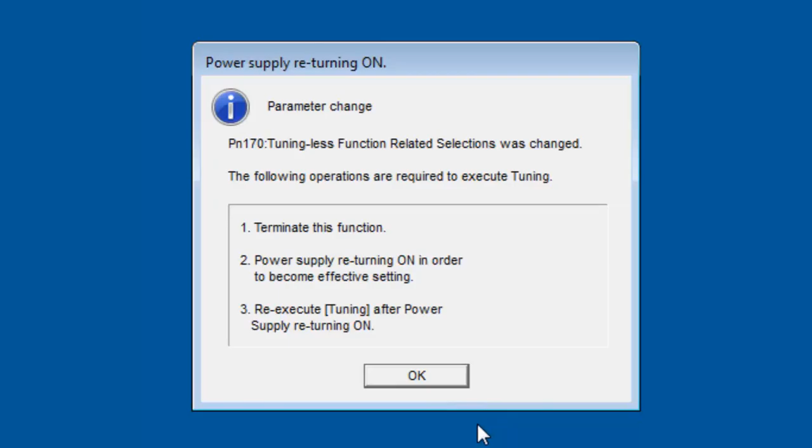Here's a quick preview. We'll disable tuningless on the x-axis, then measure the moment of inertia ratio for the connected load. We'll use the program jog move profile as the position reference, set the mode and mechanism, and execute the auto-tuning sequence, measuring the final response. I'll give you a few troubleshooting tips and then let you try it out on your own with the y-axis. So please follow along and let's run through auto-tuning.

To improve the response beyond the capability of tuningless, the next stop is auto-tuning, as long as the load inertia does not change. Autotuning is an algorithm that measures the servo response and iteratively makes tuning parameter adjustments while the machine runs a test move over a number of cycles. It can apply advanced tuning features such as model following control, vibration suppression, and anti-resonance.

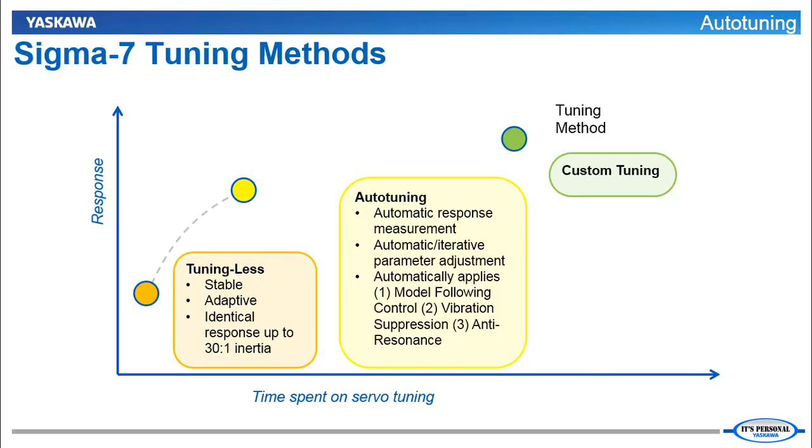As usual, I have connection here to the demo, and we'll go to SigmaWin Plus version 7, and let's start with a clean screen here. Close any other windows you may have open in SigmaWin Plus. And you see here we are connected on axis A, that's the x-axis. The first step to get down to the auto-tuning is to go down here to tuning. And the summary of these warnings is simply that the motor will move and won't return to the place it is now. Let's click execute. And by clicking OK, we disable the tuningless function.

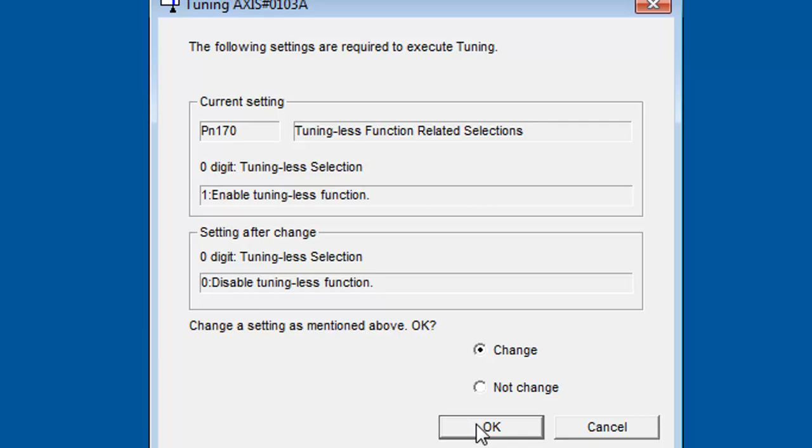OK. We need to reboot, cycle power, software reset. So OK. Into the menu, software reset. Execute that, and click execute. Okay, it says we should reconnect. So we come up here to menu, disconnect, and connect again.

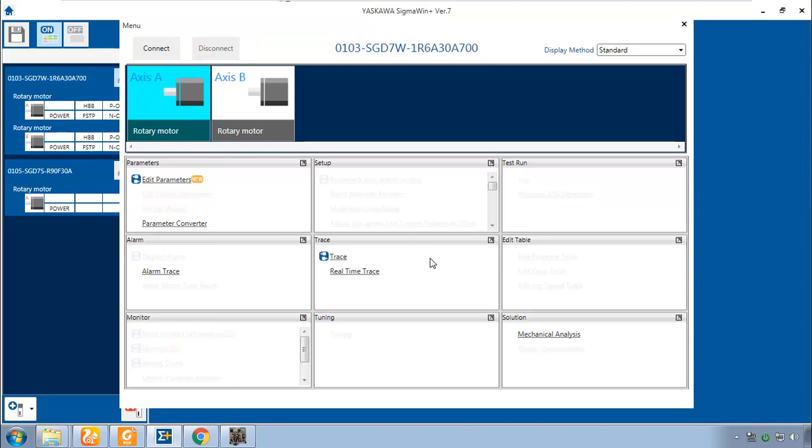Now that tuningless is off, we go into tuning again with the same message. And the basic auto-tuning process is outlined right here. We'll start at the top and work our way down toward the bottom. It's very important to know the load-to-motor moment of inertia ratio when tuningless is off and have that set in parameter PN103 because the position loop and speed loop gains are scaled by this parameter. So if you don't set it accurately, you're not going to get a very good tuning result.

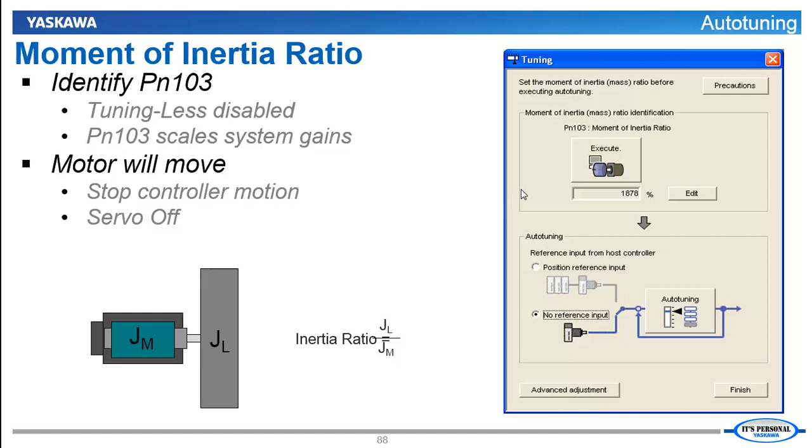For this reason, the software provides this feature to measure the moment of inertia ratio, often referred to as JL divided by JM, inertia ratio. But in order to execute that, the motor is going to have to do a little test move. Click execute, and that opens up this condition setting window for the moment of inertia measurement. You don't usually need to change the values on the left, but you do need to pay attention to the reference selection and the speed setting here on the right.

Choose a motor RPM that is appropriate for the mechanism. Generally speaking, the higher speed and higher acceleration values will result in a more accurate moment of inertia ratio measurement. Our worst case test move was 3000 RPM, and so this one here at 1000 RPM is definitely within range. You can always confirm with this button, and this gives you the speed and accel/decel time. This is the move that's going to happen over a distance of 2.5 rotations.

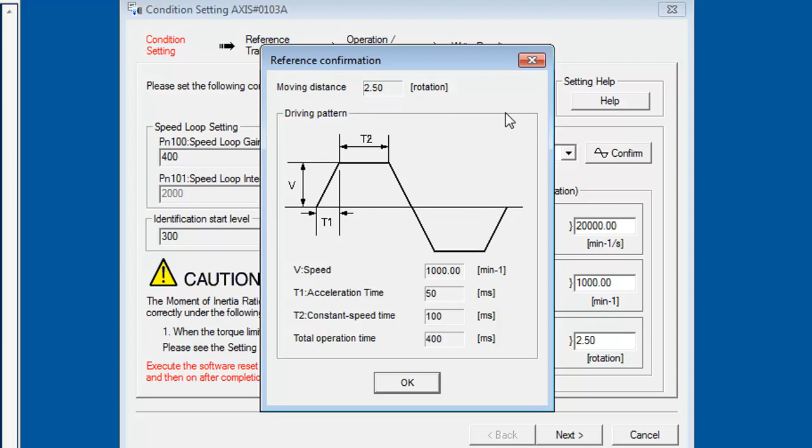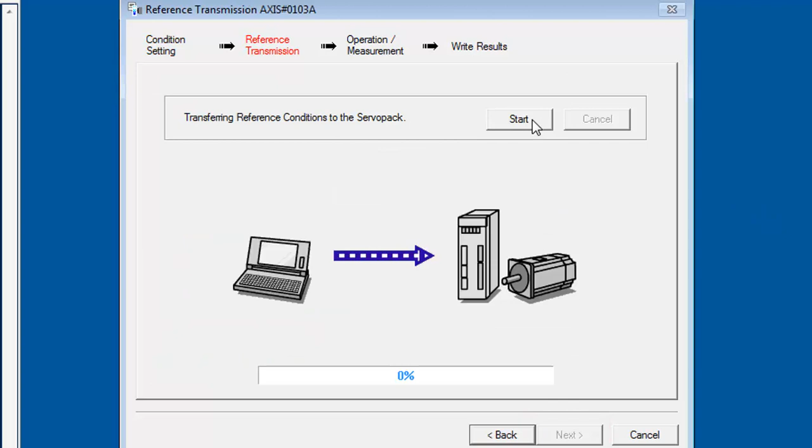So of course, check that you have appropriate travel distance, and if necessary, you can use these sliders to make any adjustments so that you don't exceed the machine's range of motion. For this demo, we can leave everything at default and click next. This is a function built into the servo, so we click start to transfer those conditions we just set to the servo. Click next again. Now let me adjust the window, and you might want to turn on the speaker so you can hear what's going on.

And now we will servo on, execute the move forward, and again reverse. You see what it did here, it iterated starting with an arbitrary value of 3 to 1, 300% load to motor inertia ratio. It did this test move and it comes up with now a closer value of 10 or 11 to 1.

We'll do it again, forward. And reverse. And again, forward. It's doing a little test move, and it's running the equations of motor sizing backwards. Torque equals inertia times acceleration. Well, it's measuring the torque, it's measuring the acceleration, and trying to figure out the inertia. Hit reverse. Now we've got about 15, 16 to 1. Again, forward.

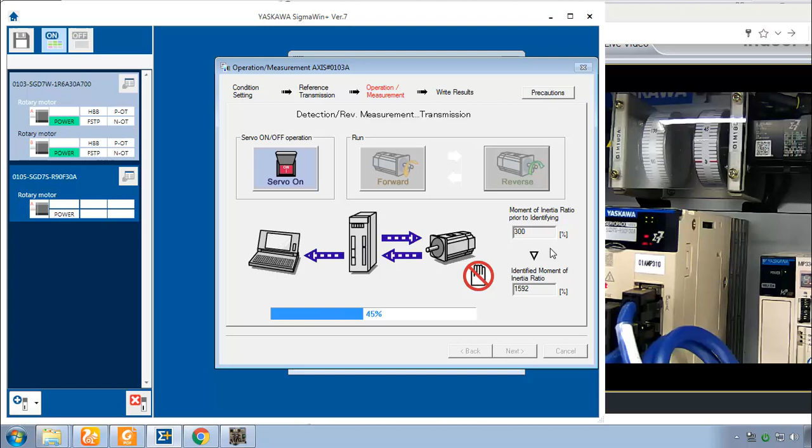And it looks like it's settled in on 15.93 to 1, or 1,593%. So follow this here through to the end with next. Turn the servo off. And now we can write this result into the parameter, PN103.

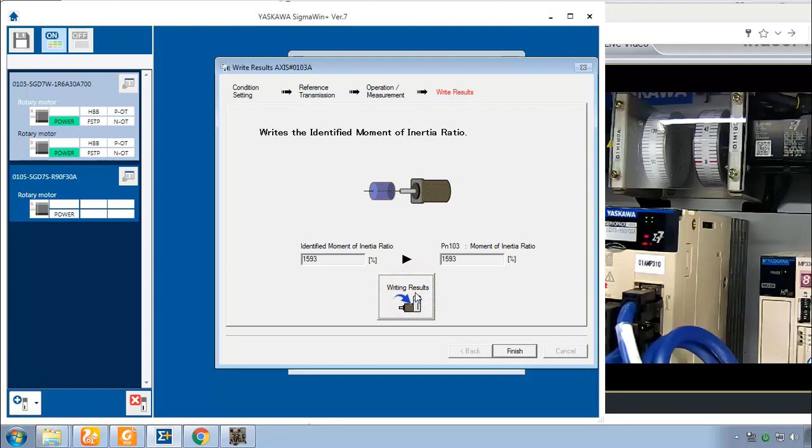Finish this up. We're prompted for software reset, okay. And here they even pop that up for us, software reset. Drive turned back on, software reset's complete, and we're back to the tuning screen with the inertia ratio measured and set.

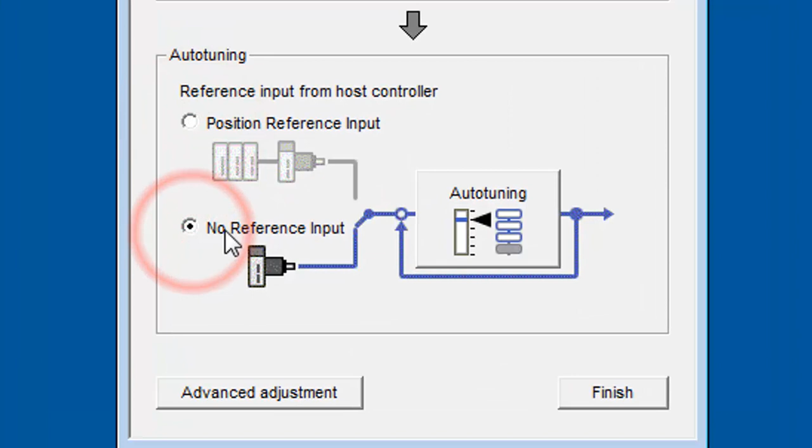Okay, now we're ready for the next step, which is auto-tuning. You've got two choices here, position reference input and no reference input. Which one do we choose? We'll choose position reference input. The difference is shown in the little picture here, the controller sending a command to the servo or no reference input, which would mean that this function itself can set up its own little test move, similar to what we had here in the moment of inertia ratio measurement.

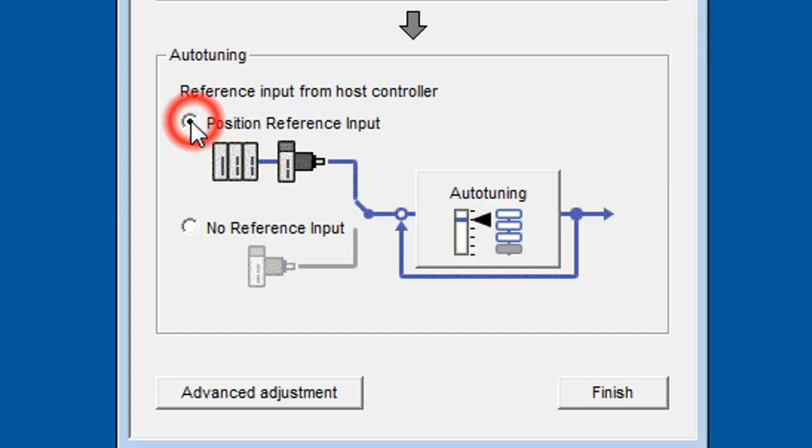So while program jog is internal to the servo, it's still seen as a position reference input to the control system. So we'll use position reference input to tune to the worst case move that we have set up in program jog. And click auto tuning. This is our final setup screen for auto tuning. We have mode selection and mechanism selection and tuning parameters.

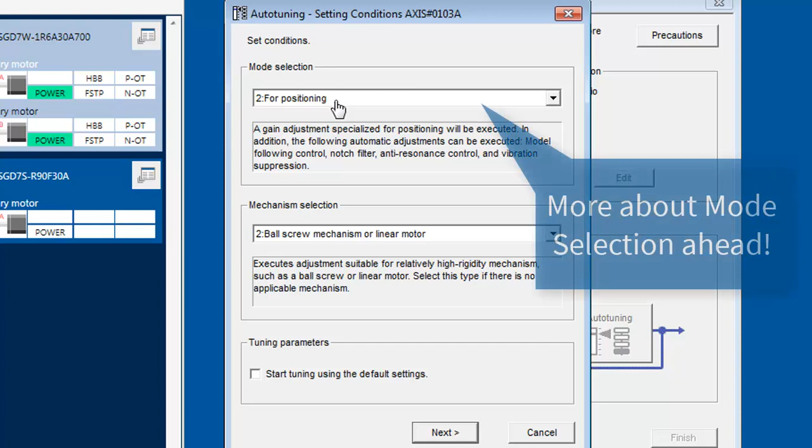The default is mode number 2 for positioning. We'll leave it at that. The mechanism we will change to rigid model, and we will check the box start tuning using the default settings. So why choose mode number 2? Well, there's 3 modes here. Mode number 1, standard, will allow you to have the lowest position error, but not the lowest settling time. If you want the lowest settling time, then you choose mode 2 or mode 3.

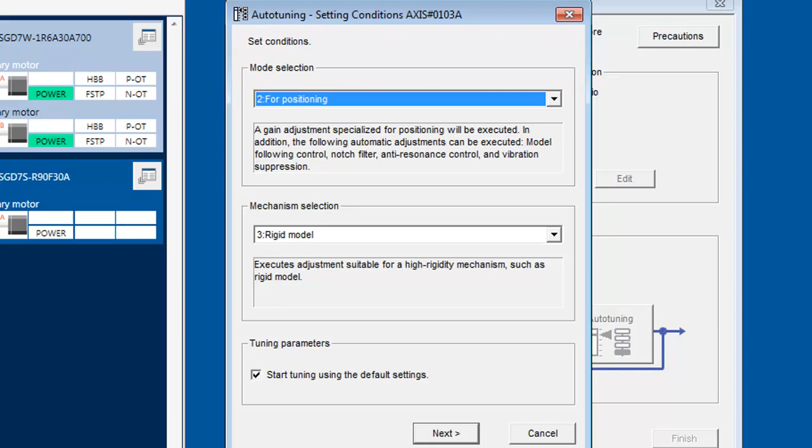See, mode number 1 allows you to use notch filter and anti-resonance, but mode number 2 allows you to use model following control and vibration suppression in addition to those two. And mode number 3 is basically the same, but may result in slightly longer position settling time in order to prevent overshooting, meaning that as the motor stops, it won't overshoot the final target position. With mode number 2, the motor may overshoot slightly, but the total position settling time will be the shortest.

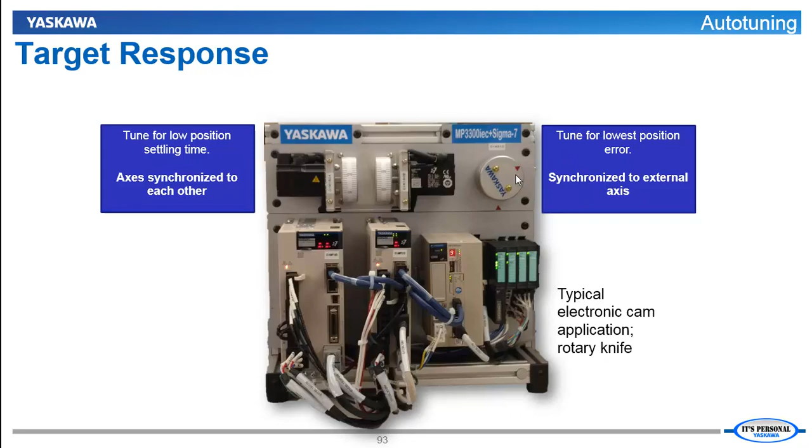Now, what about mechanism? We chose rigid model. Why don't we choose belt or ball screw? The simple answer is just choose the model that most closely represents what you have. But what these 3 mechanism selections are about is setting the level of mechanical compliance in your system. Systems with more mechanical compliance, like a belt mechanism, tend to be less stable, whereas this rigid model is very stable and will be capable of a very high frequency response.

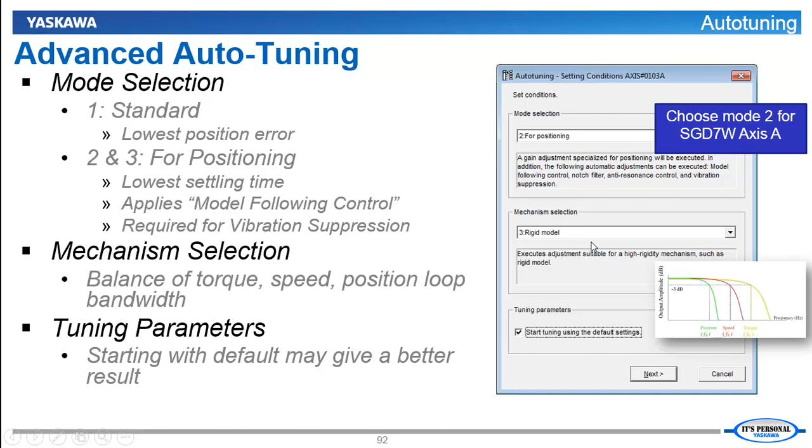The setting you choose here balances the bandwidth of the torque, speed, and position loops and helps keep the system stable based on the level of rigidity or mechanical compliance in the system. So that's why we chose rigid model. Finally, you should check the box for start tuning with default settings. The auto-tuning algorithm is optimized for starting with default and finishing fully tuned. Running auto-tuning a second time does not improve the result.

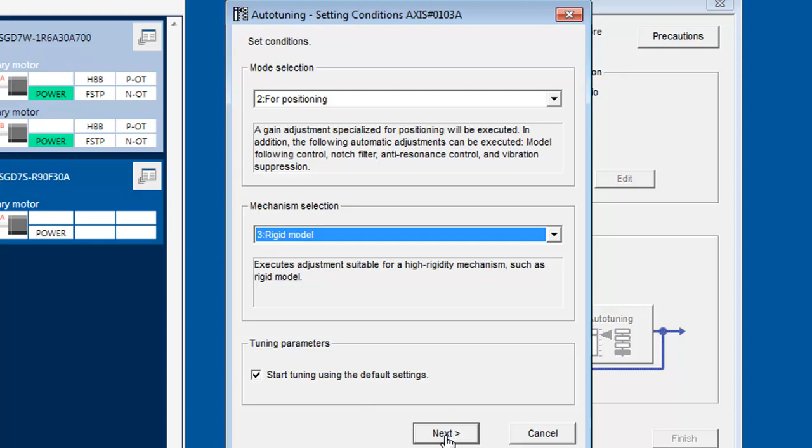However, if you've set some parameters, for example, to eliminate the noise, you may have reduced PN100, you might leave this box unchecked so that it doesn't revert back to default. Okay, it's time for the moment we've all been waiting for. We'll click Next. We'll confirm that we're setting the tuning parameters, only the tuning parameters, back to their default. And click Yes. We confirm the inertia ratio that we just measured.

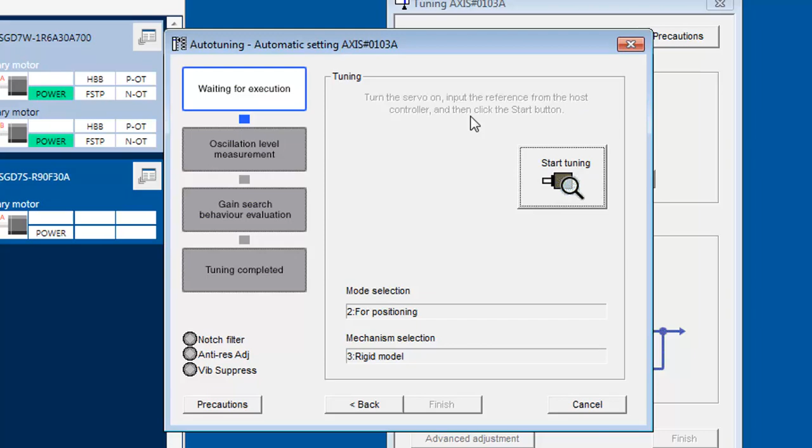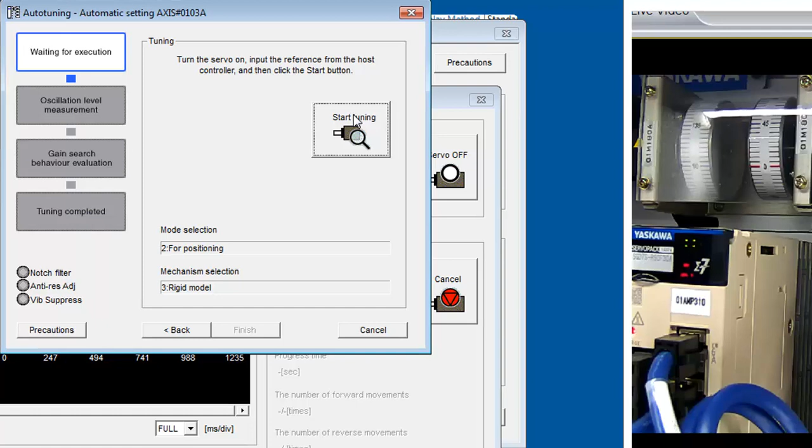And read what it says here in flashing letters. Turn the servo on. Input the reference from the host controller, which is Program Jog. Then click the Start button. So we need to pull up Program Jog. Okay. I have that same worst case move profile. And we'll do what it says. Turn the servo on. Input the reference means execute motion. Yes. The motor's doing the move. And we click Start Tuning. Yes.

You see as it's going through its different phases here, the first thing it does is measure oscillation. See what happens to the motor as it stops. That way auto-tuning can tell if it needs a notch filter or anti-resonance filter or vibration suppression filter, and it will attempt to apply those at any time. And you can hear sometimes as the response of the servo is more aggressive, you'll hear that even audibly.

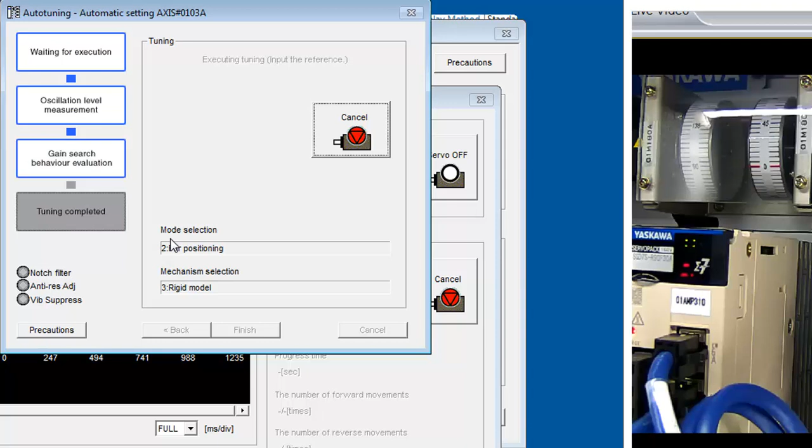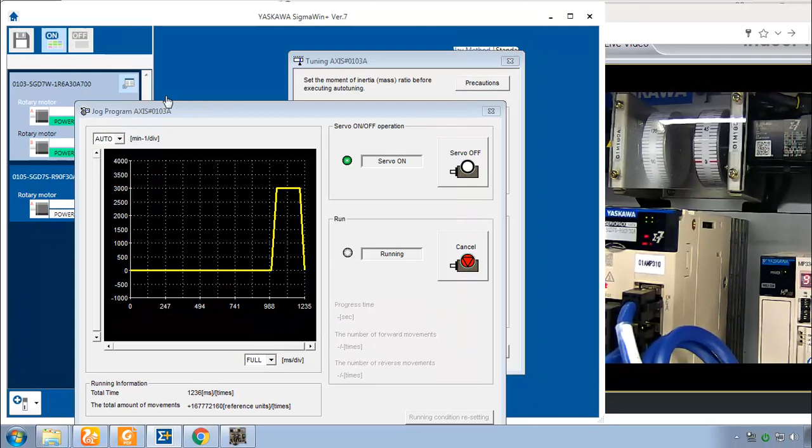Alright, it'll take a good number of moves, maybe around 100. When the flowchart reads tuning completed, you can finish it. And let's take a trace now and see how much the response has improved.

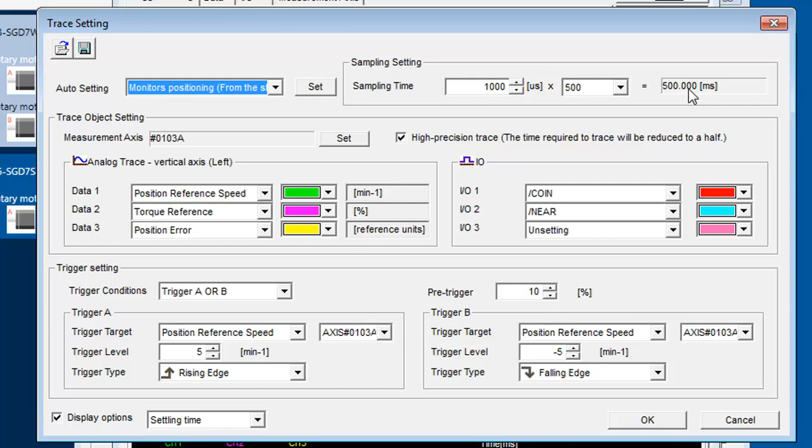Got the menu, the trace. Let me double check my setup. I'm going to do positioning from the start with high precision trace. Display option settling time, and I think 500 milliseconds will be enough for this. Okay. Start.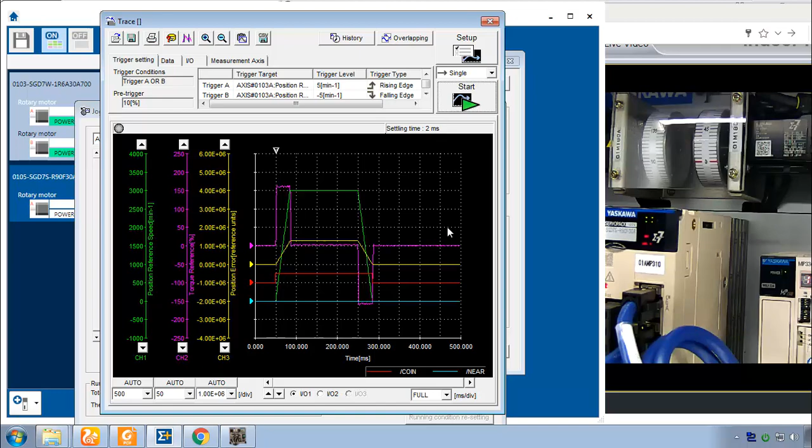My auto measurement's giving me a settling time of 2 milliseconds. I hope you're impressed. Let's zoom in and confirm that. Okay, I've got the coin signal right here. Well, it's hard to say. The position reference speed almost looks like it's stopped right on the mark here. Maybe we need to zoom a little more. Yeah, I'd say 2 milliseconds is pushing it.

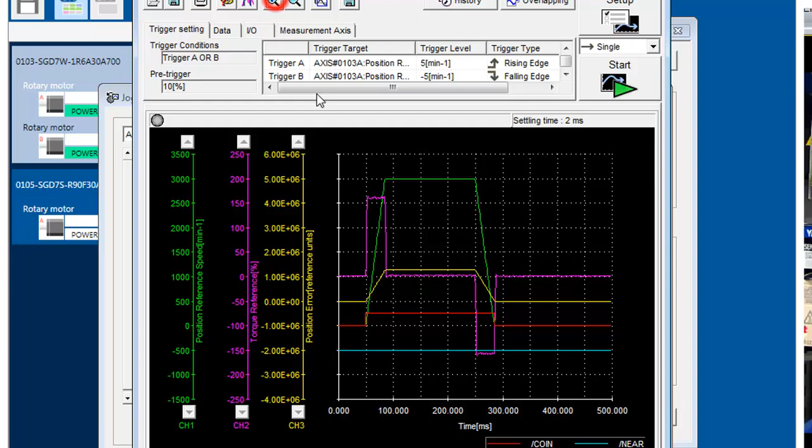All right, zoom out. Okay, what else are we going to measure? We will measure the maximum position error. It looks like we have from A to B, the difference on channel 3, 1.29 times 10 to the 6. So still quite a high amount of position error, although not as high as it was before.

And finally, let's zoom into the torque reference. And let's measure that torque ripple during the move. I would measure it about like this. And I'm seeing about 1%. Now back in our tuning results table, let's make a note of that.

We had 0 to 2 milliseconds for the settling time. 1 times 10 to the 6 pulses of position error. And I had 1.1% rated torque ripple. But comparing to the default, we've really brought that position settling time down. The position error is still reasonably high, and the torque ripple is well below 5%.

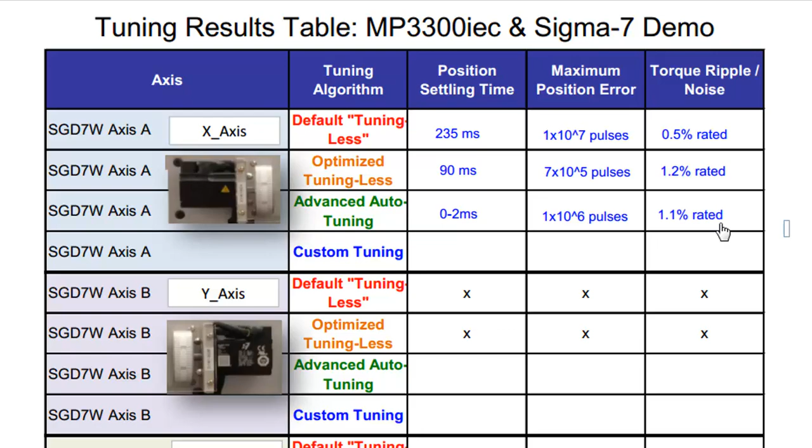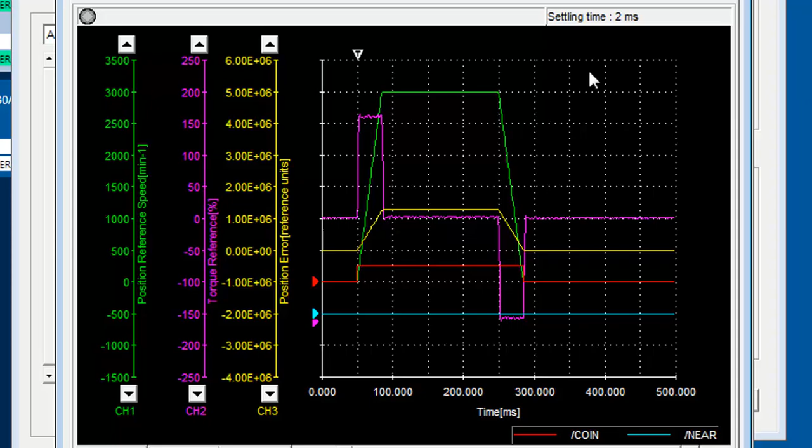What this means is, while the position error is very high during the move, you see that as the motor decelerates, that error does come down, and we get into the final position at the right time. So the motor's not exactly following the commanded profile, but that's because the most important thing for this method of auto-tuning is that final position and the lowest possible settling time. This is a result of model following control, and we'll see more about that in the next section on custom tuning. All right, I think we can save this result for the trace.

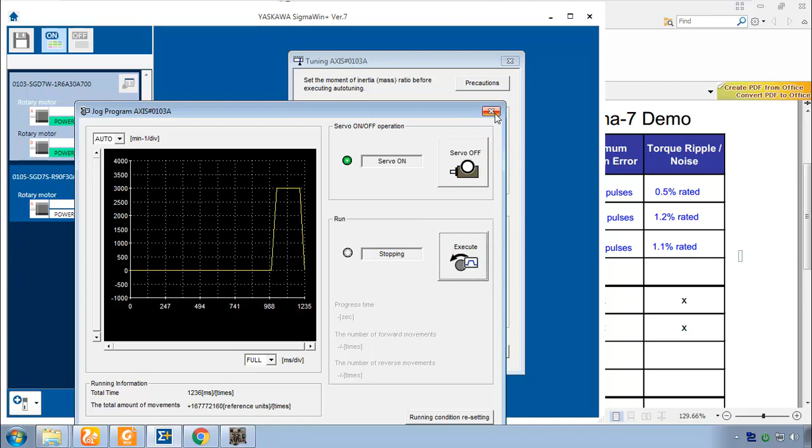I'll call it X Auto Tuning. Save. And let's look now at the parameters that were changed, just out of curiosity. I'll cancel this move. All right. Close all these windows. And look at the parameters. I think this is also a good time to save these parameters to the project. Okay, and save that before we forget.

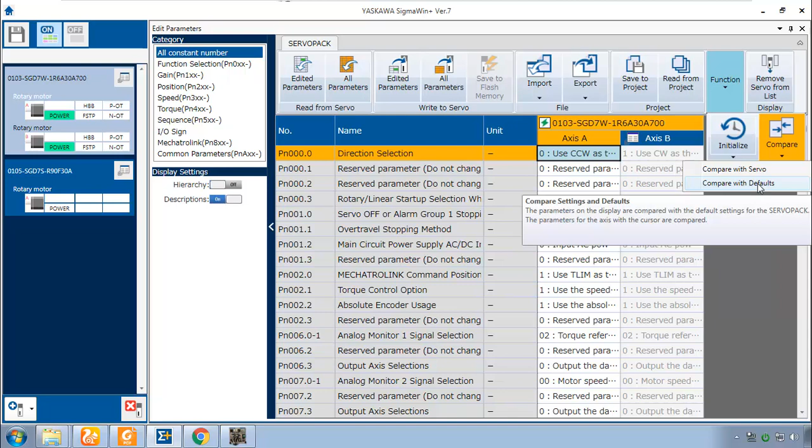And now, what parameters have been changed from default? Go to function, compare with defaults. And we can look at the gain. And this is a good summary of everything that's been changed by auto-tuning. Speed loop gain, position loop gain, moment of inertia ratio. We got some feed forward, we got model following control, tuning-less is off.

And you can see how these 3 parameters that dictate the bandwidth of the 3 control loops are all on this list. If you want, you could even run those equations, see what the bandwidth is. Don't expect your result to be exactly the same, but it should be relatively close for each of the demos.

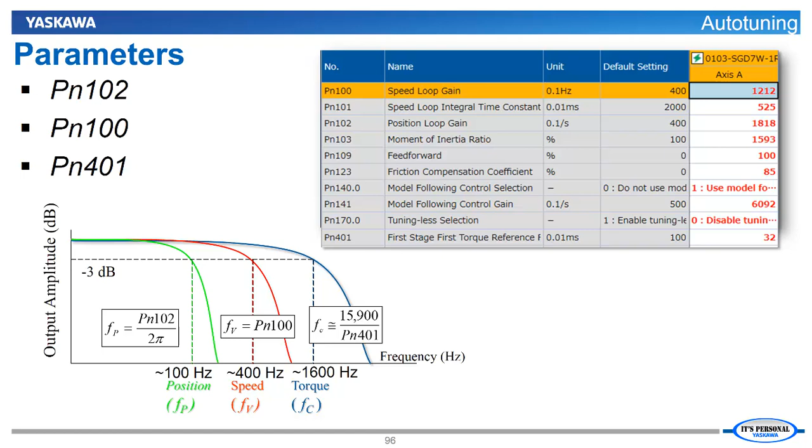It is possible that when you run auto-tuning that it will fail. So let's give you a little troubleshooting information on that. The main reason that auto-tuning might fail has to do with that coin signal. The coin signal must go low, meaning it must turn on in between moves. So why might it not turn on?

Well, if that positioning completed width parameter Pn522 is too low, then if the motor is not tuned very well, it will never turn on. If this happened to you, it's probably because you left Pn522 at the default of 7. That means 7 encoder pulses, and that's just not a very realistic position complete for most systems.

Another reason it can fail is there's just not enough time between the test moves in program jog. 1 second between moves is usually enough, that's why we used 1 second. But if you do need to tune to a very narrow positioning completed width, then you might even want to set up the program jog with even more time between moves, maybe even up to 10 seconds, just to be sure that that coin signal will indeed turn on.

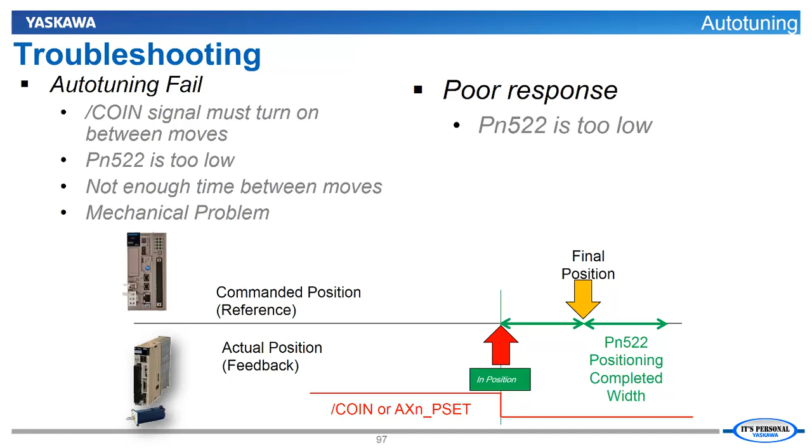Please keep these troubleshooting tips in mind as you now auto-tune the Y-axis just like we did the X-axis. And record your measurements for the auto-tuning of this axis. It's essentially the same motor and the same load as the X-axis, but do you think the auto-tuning result will be the same? Now, just a couple tips before you get started. Remember to select axis B every time you open the menu. And let me show you, you have to set up the trace a little bit differently.

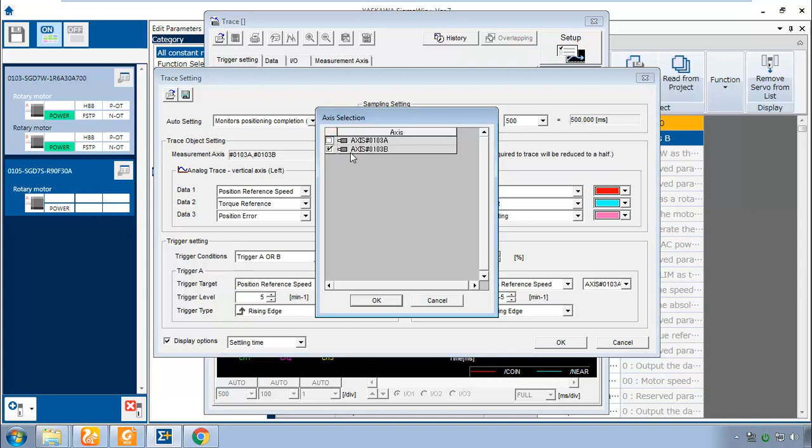So for axis B, you click on the menu, always select axis B, but now when you choose trace, go into your setup, and you need to set the measurement axis to select axis B and only axis B. If you select both axis A and B, then the trigger will be looking for motion on axis A. You could manually change that, but it's just as easy to uncheck axis A, and now axis B becomes the trigger. The rest of the setup is the same.

So please pause the video and go through auto-tuning on your own. If you run into trouble, I would recommend you compare the parameters between axis A and axis B in SigmaWin+. In the remainder of this video, I'll run through the process myself very quickly. And at the end of the video, I'll show you how to get both of the motors moving at the same time and how to graph that.

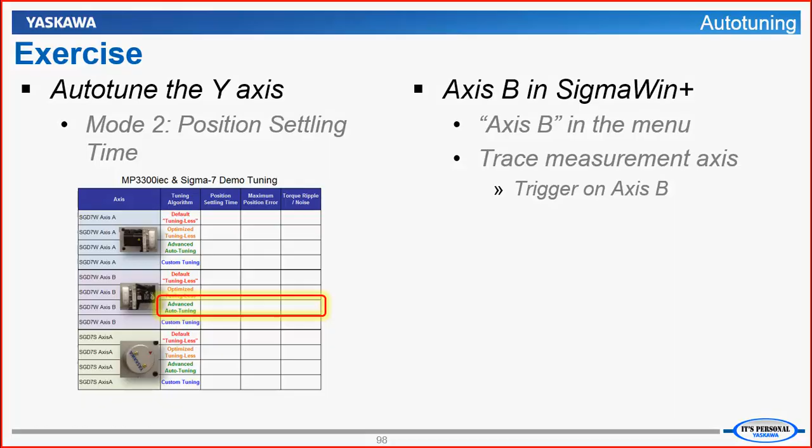Alright, I'm going to quickly run through auto-tuning on what we're calling the Y-axis, connected as axis B of the SGD7W dual axis amplifier. First thing is to look at those Pn500 parameters. Check that my position deviation overflow alarm has 3 zeros at the end of it. And as long as I'm here, I'll also change the positioning completed width to match axis A, 4660. That's 1/10 of a degree. And write those in.

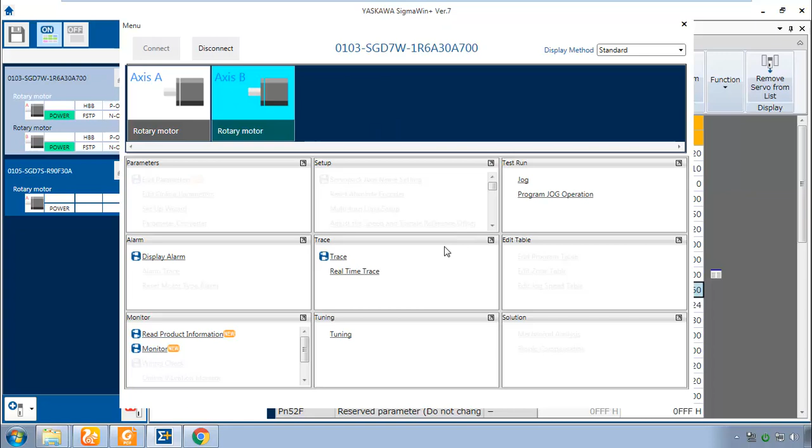Now we'll go to the menu, click on axis B, and go to tuning, execute. First step, turn off tuning-less, okay. Got to reboot. So okay, close this menu. Not going to save anything yet. Again, axis B. And software reset here under setup. Execute that. There's the amplifier turning off and back on. Go to auto-tuning again.

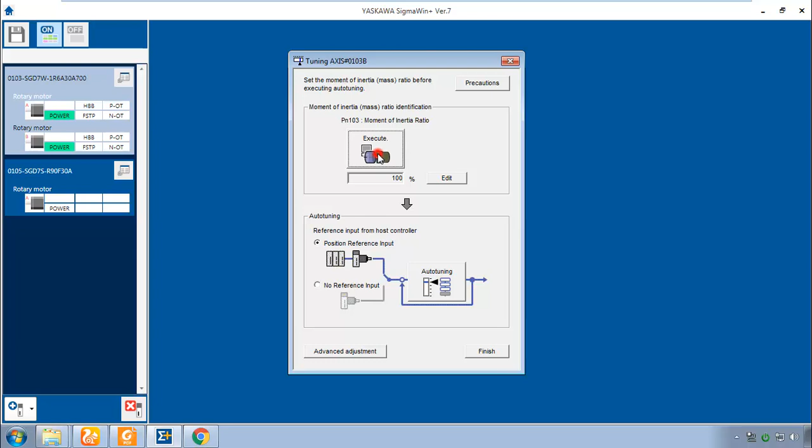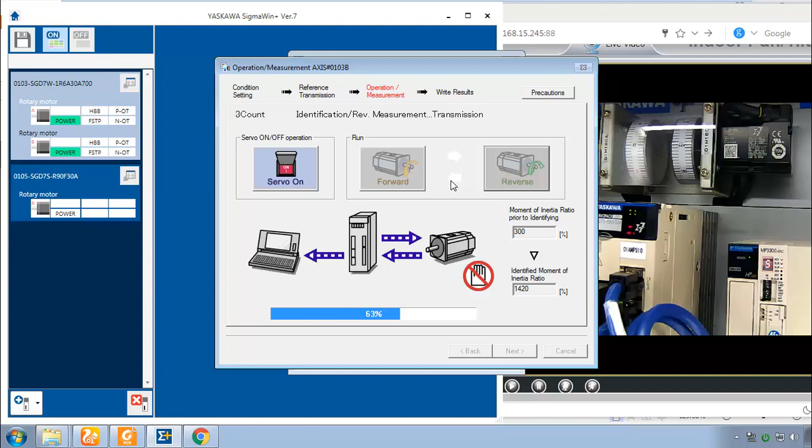Axis B, tuning. Execute. The first step is measure the moment of inertia. So execute that one. Leave everything at default like we did on the X-axis. Start this. Click next. Servo on. Forward move. Reverse move. Do it again. And again. One more time. Reverse. And I think this will be the last time. Forward. The last time reverse.

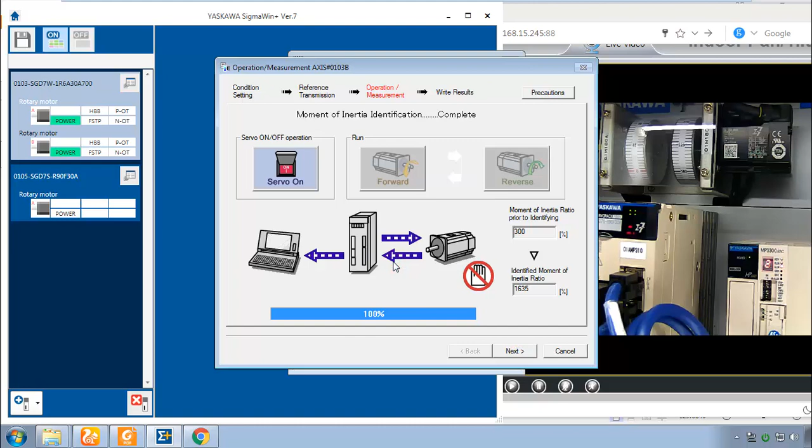Final inertia 1635. It's detecting a little bit more than the other axis, but that's okay. Okay, moving on. Write that parameter in and finish. Got to do another reboot. Okay. Drive's turning off and back on. That reboot's done. We can now go on to auto-tuning.

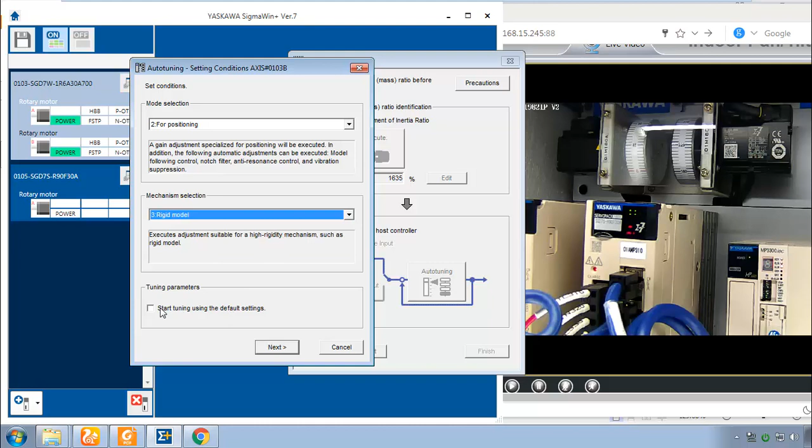I'll do mode number 2 for positioning. The mechanism is rigid model. And we check start from default. Confirm the default. Confirm the inertia. And now we need to start a move. For that we use program jog. Axis B, program jog. Okay. I'll use the same move as the other axis.

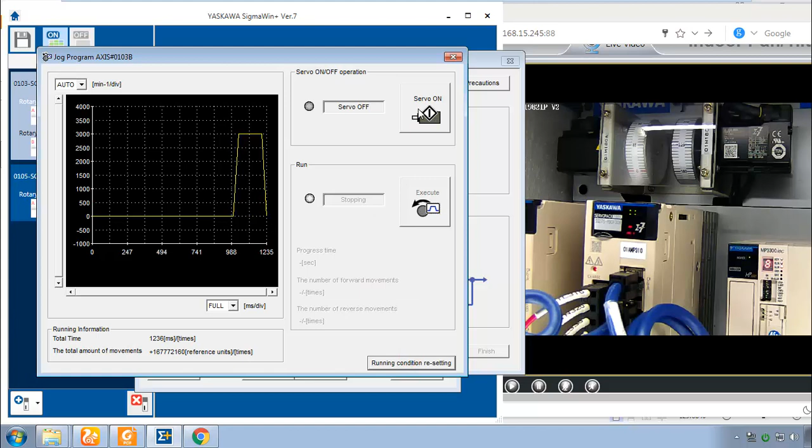16777, 2160 at 3000 RPM, 35 milliseconds, 1 second, 0 for infinite. Looks the same. And we'll run this. Servo on. Execute. Confirm. All right. We're moving. And start tuning. Yes. Oscillation level measurement complete.

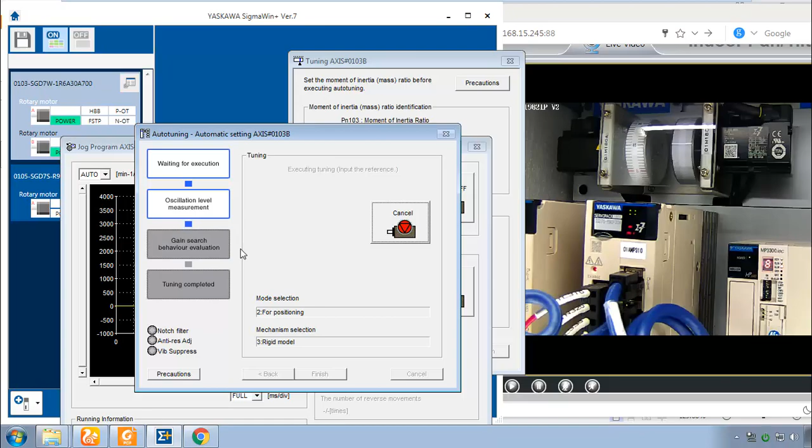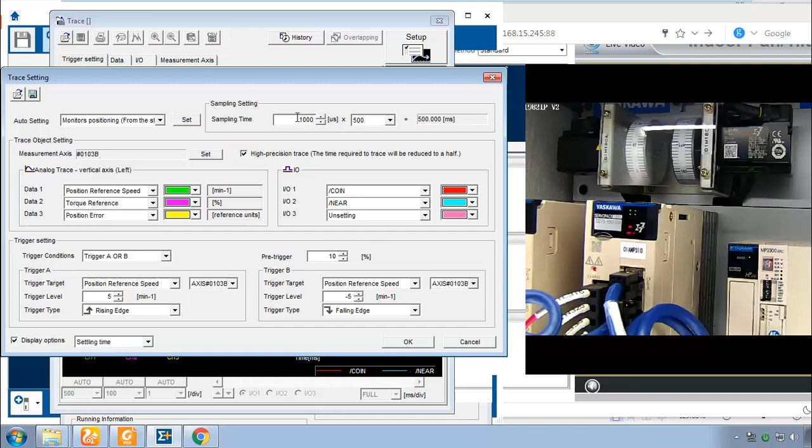Gain search takes a while. And tuning is completed. So finish. Let's take a graph. Axis B, trace, go to the setup. We will select only axis B. It says measurement axis B. I'm going to do position from the start, set, high precision trace, 1000 sampling time, so we have a half a second. Got the display option checked also.

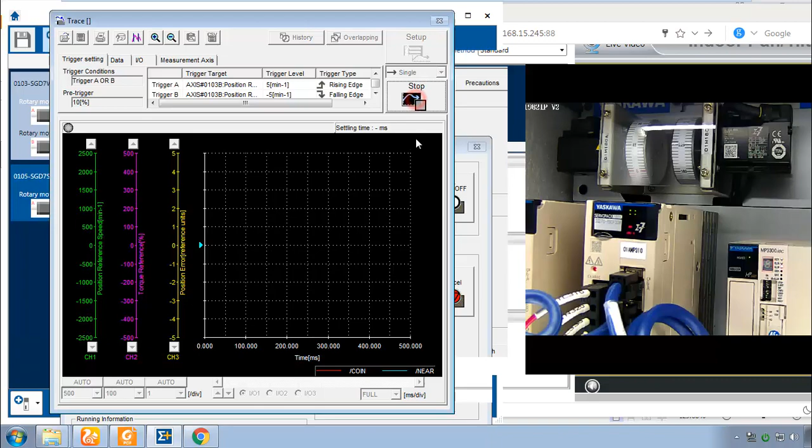Okay, start. And I'll cancel this move. Okay. Alright, let's measure the move. Settling time 2 milliseconds. I'll zoom in and verify that.

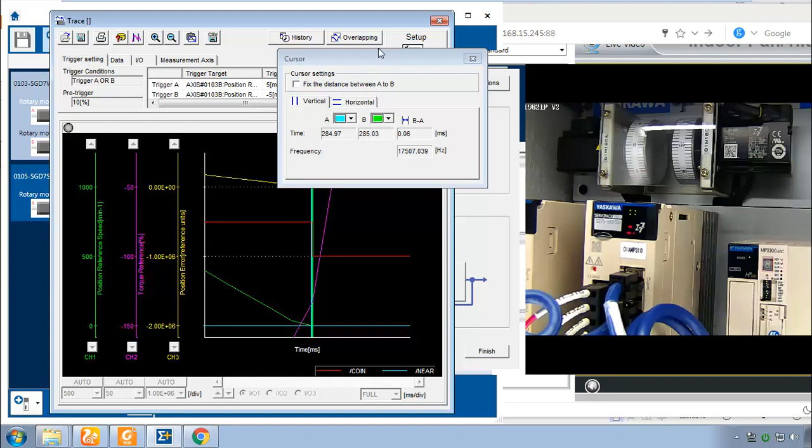Cursors show more like 0, unless you count this little bit here. Well, even that, 2 milliseconds is like this far. I'm going to say 0. So same settling time as the axis A. Somewhere between 0 and 2, depending on how you measure it.

Now the position error is horizontal cursor. Put A at 0. Put B at max. Got 1.22 times 10 to the 6. And zoom in a little more for the torque ripple. Zoom a little more. Torque ripple I'd put at about 1.9.

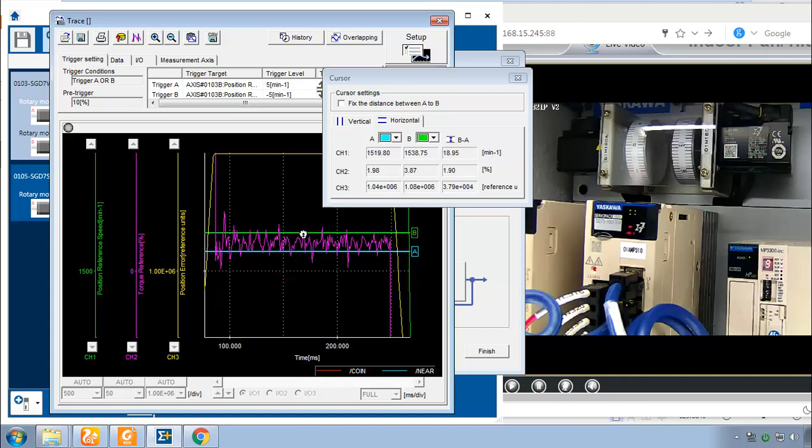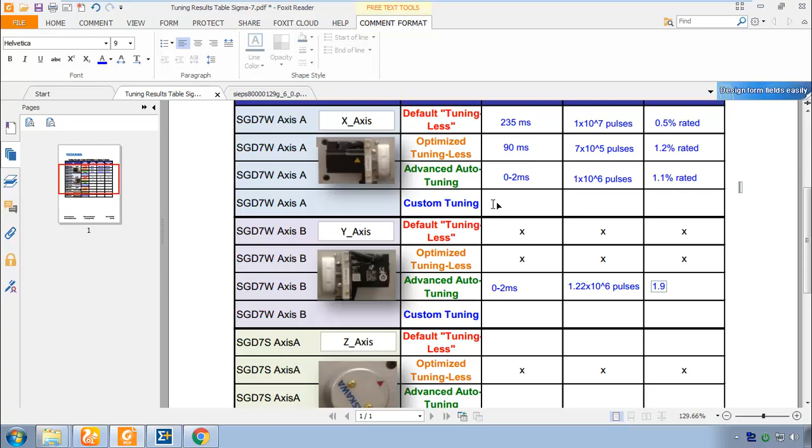So we had 0 to 2 milliseconds here. I said 1.22 times 10 to the 6th pulses. Torque ripple was higher on this motor, 1.9% rated. So now as a little bonus, I said I'd show you how to get both of these motors moving together at the same time.

The way I'm going to do that is to use the command from the controller. There's a built-in functionality of the remote I/O. So you need a remote I/O connected for this. And the first thing we need to do here is reconnect the controller over Mechatrolink 3. So go ahead and click on Reboot Controller and Servos. You know that works when the display goes out here.

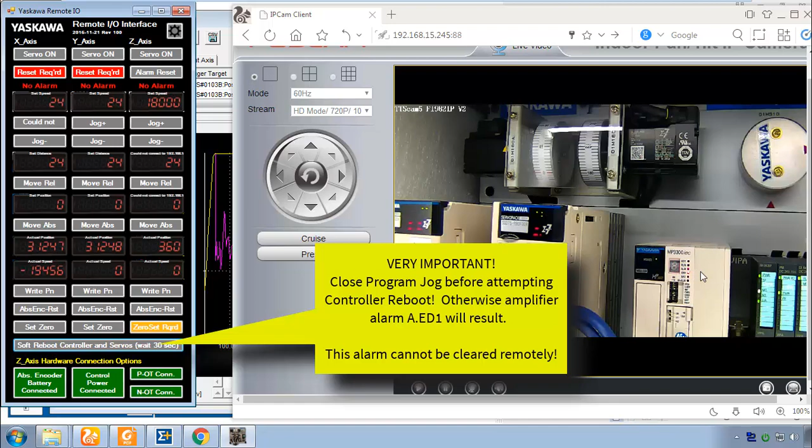Alright, that went out. Also, you see like a little lowercase c at the beginning of the reboot cycle of the controller. And that takes a good 30 seconds to reboot the controller. Alright, when you're up, you should see no alarm on all 3 axes, and then set the speed to 18,000. Like you see here, that's 3,000 RPM on the Z-axis.

And what will happen here, if you turn the servos on and jog the Z-axis, just hold down that button. You see that it's doing a move, and it's a very similar move to what we had just tuned. So it seems like the dwell time is a lot less. Okay, so that's how we get both of the motors to move the same move at the same time. Now let's see how that looks if we graph both.

Under the setup, be sure you have the measurement axis A and B selected. Click OK, and start. Now produce that motion. Okay, I think that's enough. It says transferring data. Actually looks like it's giving me the falling edge. Let me try my setup again.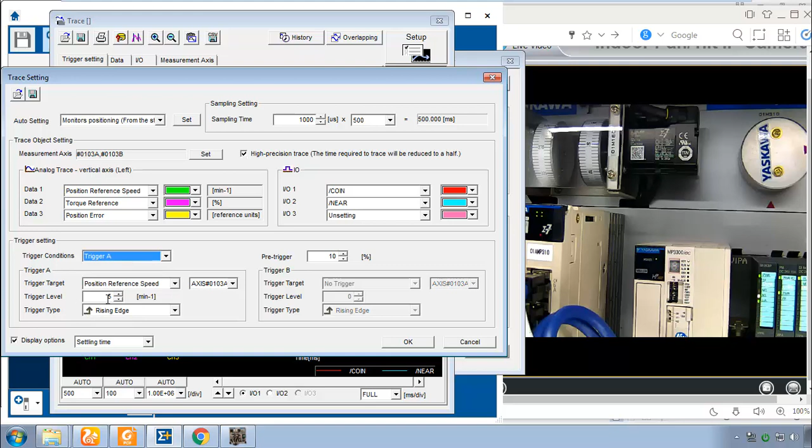We had positioning from the start, high precision trace, 1000, both axes, trigger on axis A. Let's trigger only on trigger A, rising edge of position reference speed. Click start again. Jog away. Okay, and there's the move. Looks like the distance is less, but we still made it up to 3,000 RPM commanded speed.

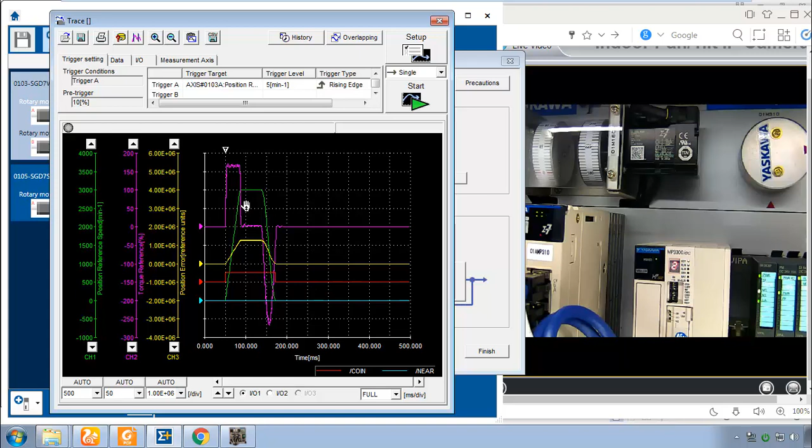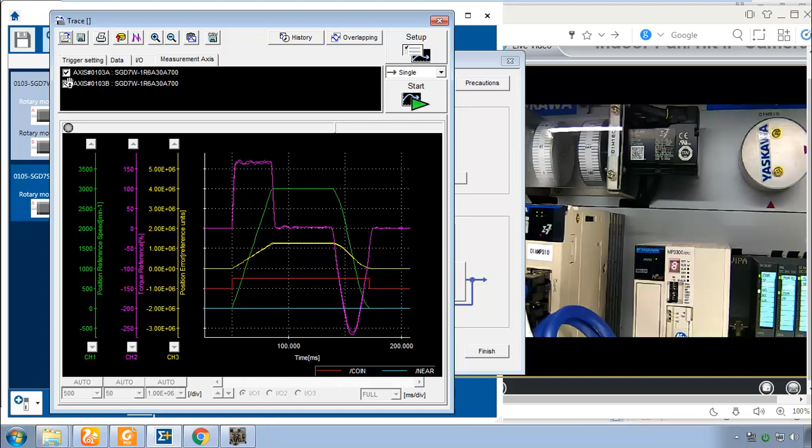So now I can zoom in here, and you see the two traces. There's also this measurement axis tab now where you can look at one or the other. You can see that they're both pretty much the same in this case. I did it before and they weren't quite the same, particularly the position error.

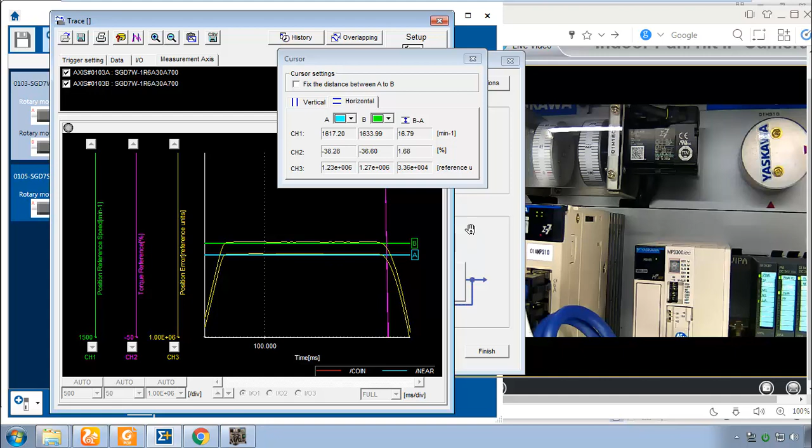Yeah, you zoom in a little bit, you can see the position error is not quite the same between the two axes, which would imply that they're not quite synchronized if they don't have the same position error. It's off by 3 times 10 to the 4 pulses. So that could be significant. And I'll go through in the next video how to even these out by setting the model following control gain equal. In fact, you can look at the parameter differences between these.

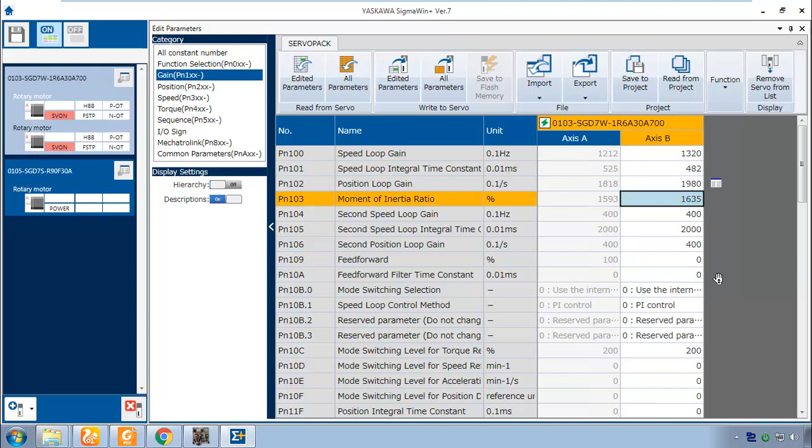Just pull up the parameter list and look at the gain parameters. You see we have slightly different values for speed loop gain, integral time constant, position loop gain. All the tuning parameters here are slightly different between the two axes. And down at the bottom, this model following control gain is significantly different. And that's the reason why they have different position error.

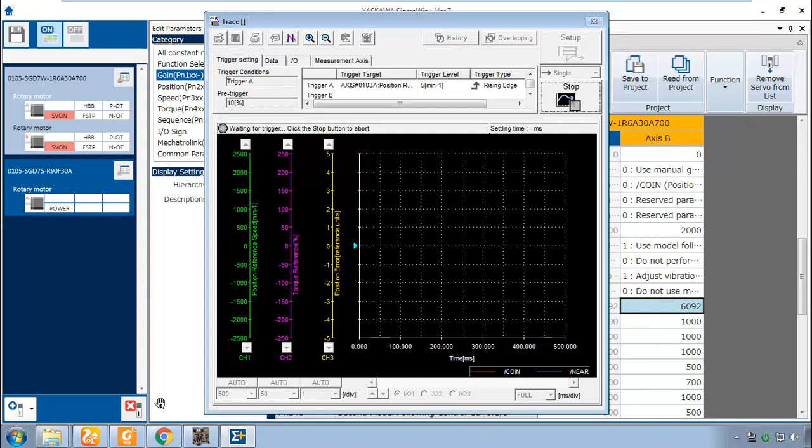If I were to just set this to 6092, let's try that out real quick. Now take a new graph. The trace, hit start. Jog that master. Okay, got something. Now if I zoom in, almost looks like one. Can't really tell the difference.

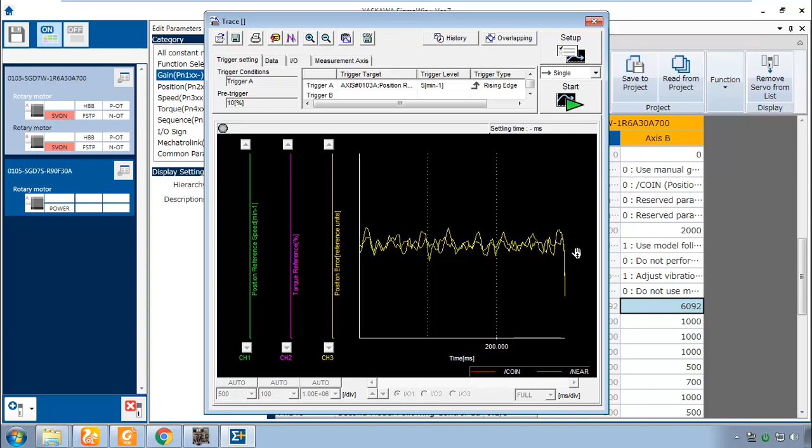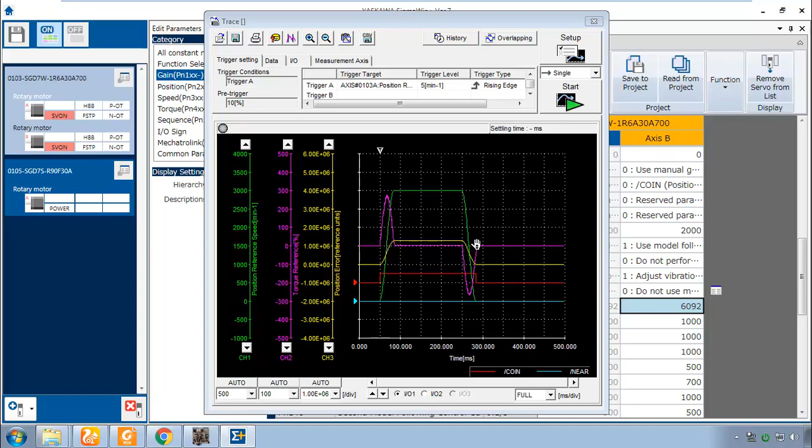You really got to zoom. And you can see those two are right on top of each other. The position error is not 0, but between the two axes, it is essentially the same. And we'll see in the next video on custom tuning how we might be able to reduce the error even further by playing with these parameters here using the custom tuning interface.